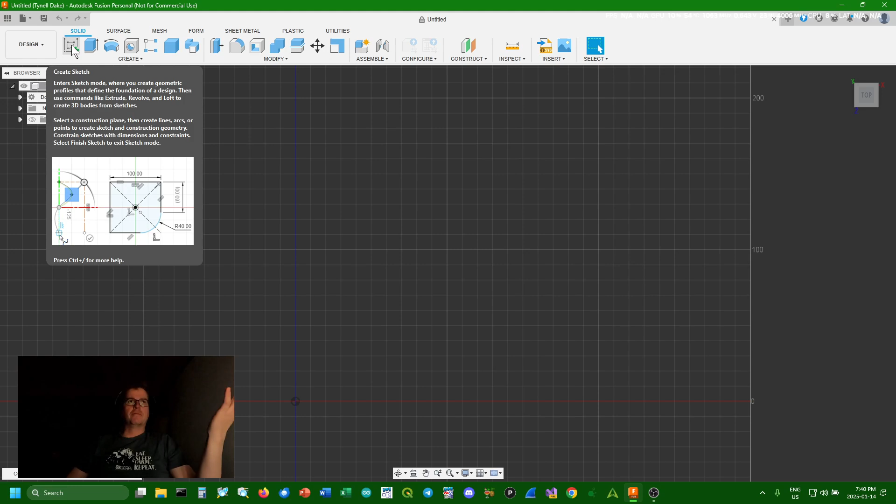Okay, so first you'll have to go to create sketch, and you pick create sketch. Then you're going to pick the plane you'll be drawing in, because since it's on a cube, you could have started not on top—you could have started on the front, or the bottom, or the sides. So you want to pick which plane you want to draw on, and I always start from the top. So click on the top.

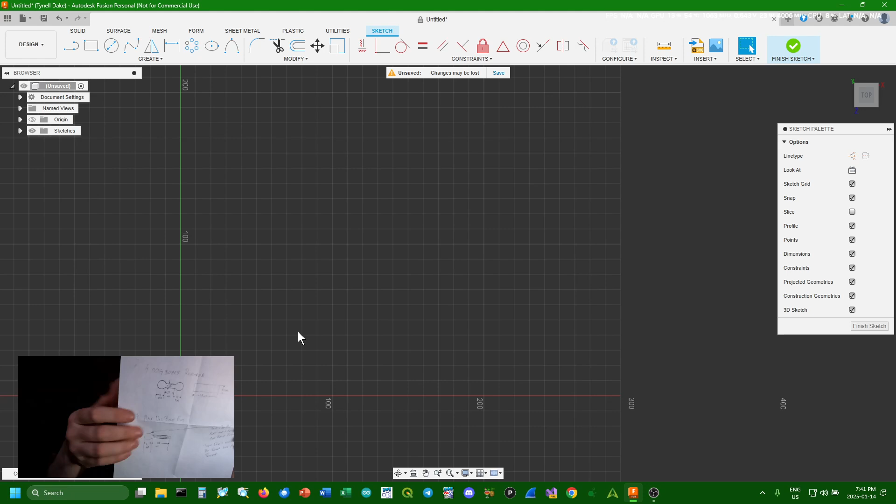Now you'll see this top changed, and now we have the drawing palette up. My father-in-law is the guy with the trains for my son, so he sent me these absolutely lovely drawings with very detailed measurements in millimeters. So we're definitely on the exact same wavelength on that.

Trying not to cover my face the whole time I'm doing this. Our first thing we have to do is we need an 11 millimeter circle.

So I go up here, I pick circle, and it's very dark—it's Canada, it's wintertime, I'm in my basement. Okay, so we pick a circle.

Circles on this thing, you always draw them as a radius, but they always measure as a diameter. So just keep that in mind.

Okay, so my Bluetooth disconnected and reconnected, so that might happen a few times today. Hopefully not—let's check... no, I've got 70% battery. Okay.

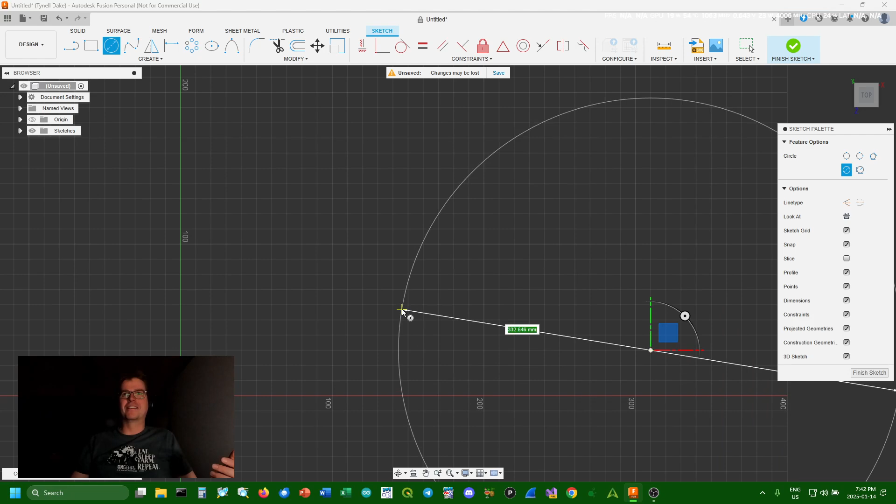So we need to draw a circle. The very first circle I need to draw is 11 millimeters, so we give it a diameter of 11 millimeters, and one of these blocks is 10 by 10 millimeters.

So we'll zoom in so it's easier to see. Then he has the total from this edge: it's two 11s and a 13, so we've got a total of 35. So we're going to go from here.

I picked line. This is where it gets kind of goofy. I'm going to go from the center over to the edge, because I'm trying to make this little dot—it's late at night, so I think it's a vertex.

I can't remember now, it's been a while—last time I stepped foot into college was like, gotta be 2005. Anyway, you get your little dot drawing from the center, because the center already has the dot on the circle, and then it'll auto grab the edge of the circle.

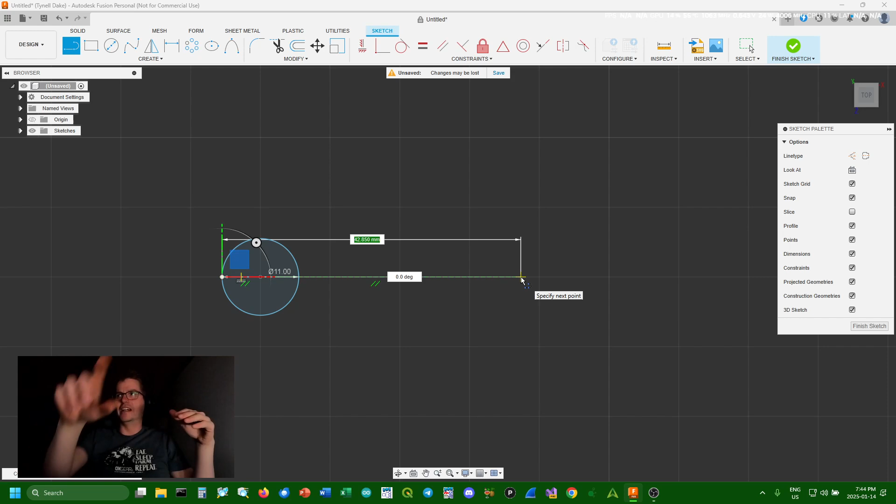Now I have the dot there, even though I have this little line here. Now I can measure back, so I pull the line over, and you can see the box turns green. Right now I can just type it in, so I wanted 35. All right, so now I know when I draw my next circle, it'll be 35 away.

So I'll click on circle again, and if you look here, there's what's called a 2-point circle. Most of your circles will be the center diameter circle, meaning you're picking the center and drawing it out, like that. To get out of this, you hit escape.

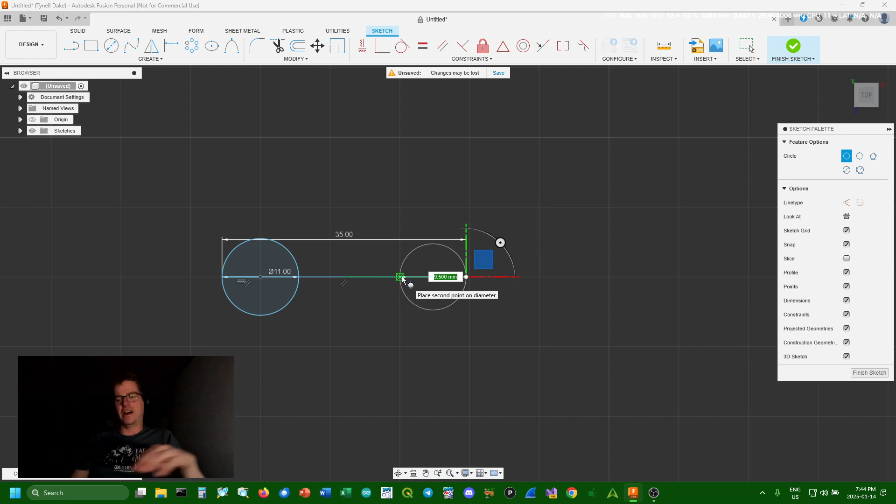But we want what's called a 2-point circle. So I'm going to start my circle on this point, and drag it back. I want it also to be 11. Then I hit enter, and bam, now I have the right dimension, outside to outside.

He gave a dimension of 13 in the center, but for drawing this it really doesn't matter too much. He says the thickness is 5 millimeters, so there's a few ways around this.

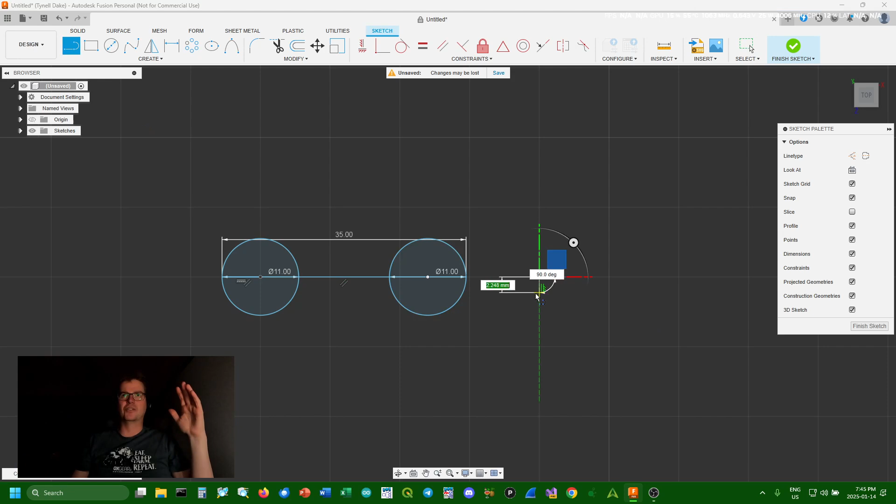One way is we're just going to go up and type in 2.5. Oh yeah, sometimes it doesn't take it. So we're going to go 2.5 and then hit enter. Okay, so now we have 2.5 there.

And then we're going to go up here. Sometimes I find if you go to the next one, so it latched onto 10 there, but now I'm going to type in the 2.5, and there it took it. So now we have a 5 millimeter thickness.

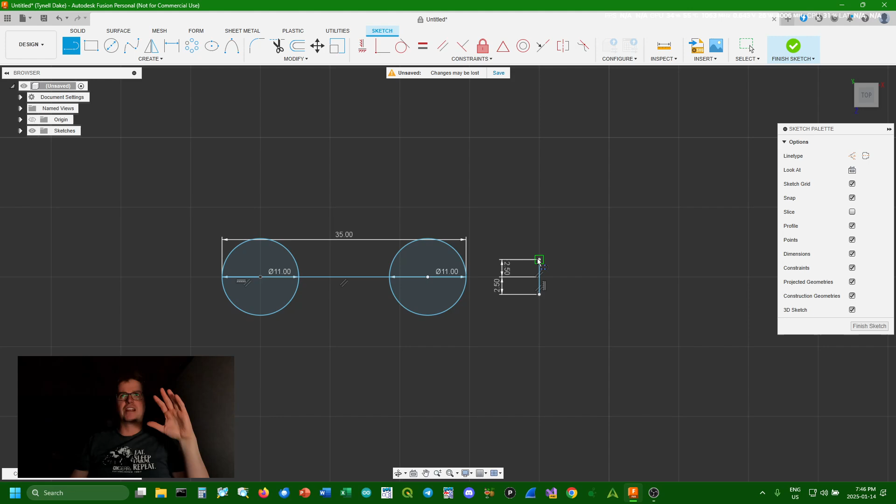You can see it starts drawing that green line, like that. That's kind of what we want. So we'll lock onto this vertex, then go out and latch onto the circle, then draw this one, and hook onto the circle.

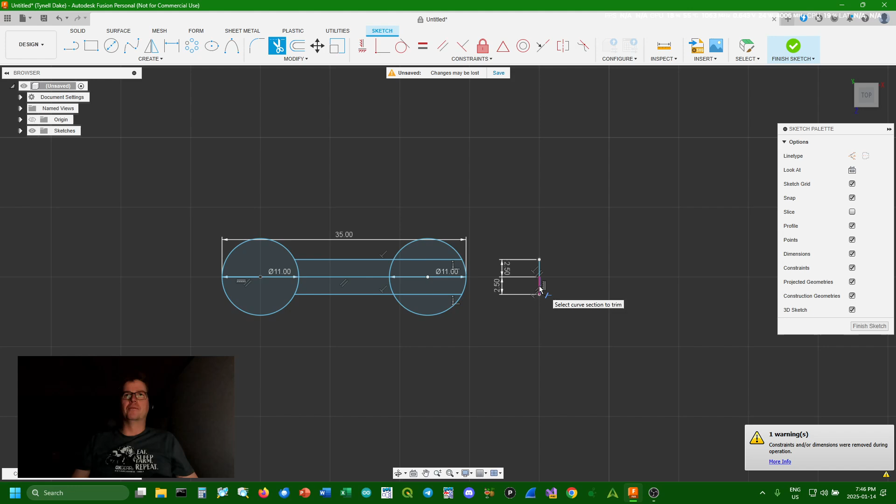So now, yeah, my hands are always up, but you want to take this trim tool, you'll use this a lot. So we take this, and now we can clip this out. We can clip that out, and that, and we can clip the inside of the circle out like that.

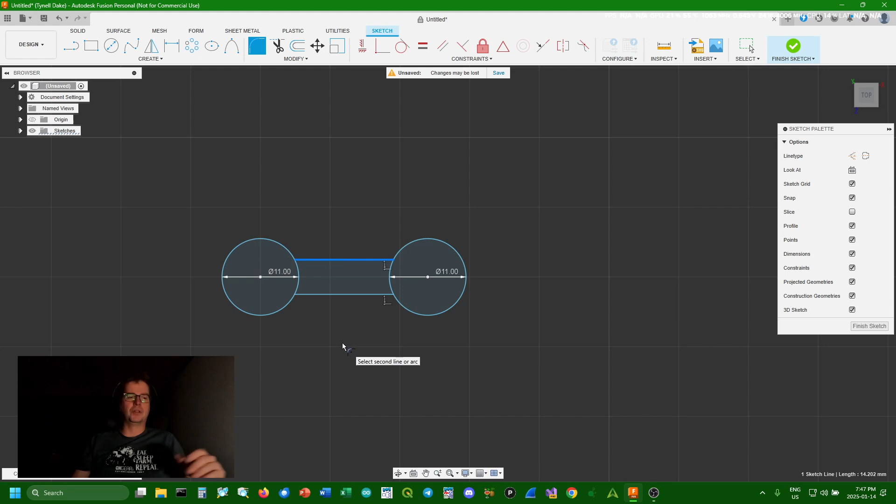So we'll go to the fillet button, we'll click on it, and then we click on it, and we click on the circle, and it does nothing because it only really works between two lines.

So unfortunately that ain't gonna work for us. I'll zoom in again, I'll try it one more time. If I click there and I click there, let's see, there's no actual angle there, so can't fillet it. But if we take our trim tool again and cut the inside of the circle out, now I think it should take off and do it. Oh yeah, there we go. It's just going to put in 1 millimeter, and that's all we want.

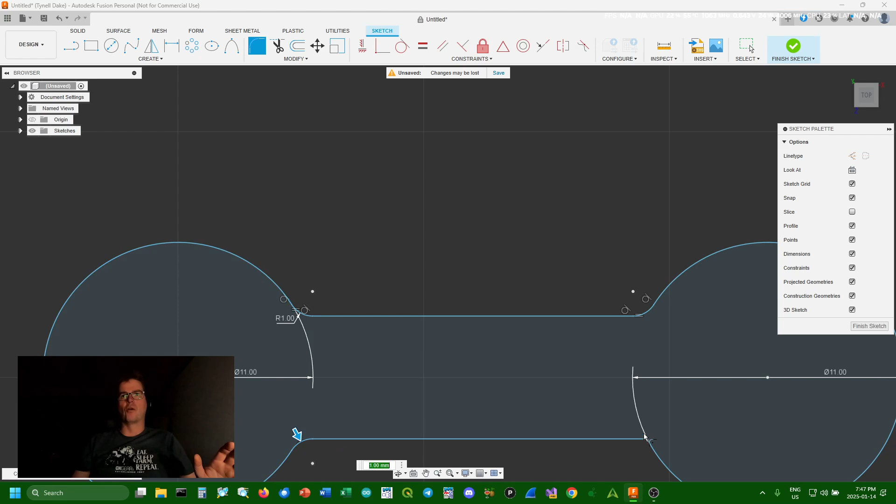Part of the reason we're doing this is you don't really want these sharp 90-degree corners on things, because that's a place where you're probably going to have cracking if you're doing 3D printing. So we're just going to get rid of those.

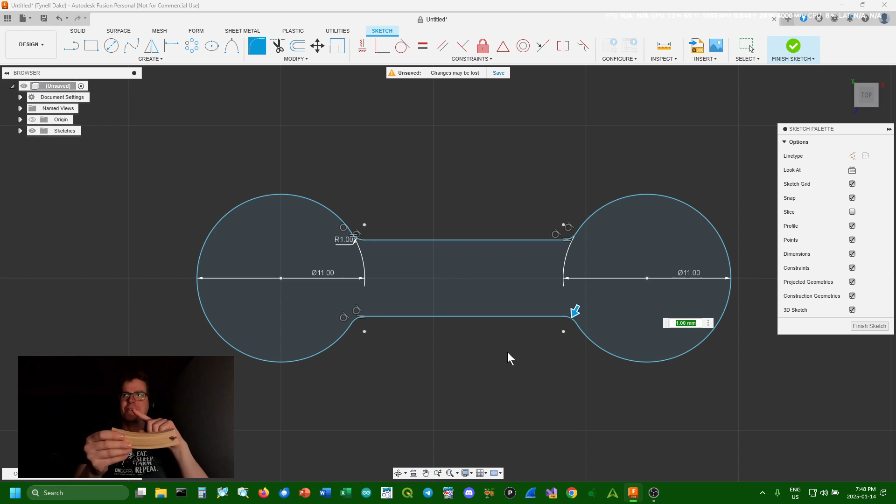There we go. So this would go on this railroad track, and you got to picture a kid playing with it. On the bottom it's very flat, and I think this dog bone, if you just put it in and it's the least bit loose, it's just gonna want to ride out. So even though he doesn't have it in the photo, I know it's gonna work better with a little bit of an apron around it at the bottom, so that when you put it underneath on the floor, it just can't ride up through.

So we're just going to add that. If you go to the offset and select that, it'll select this whole outer line if it's not broken. And then it's trying to offset it to the inside now.

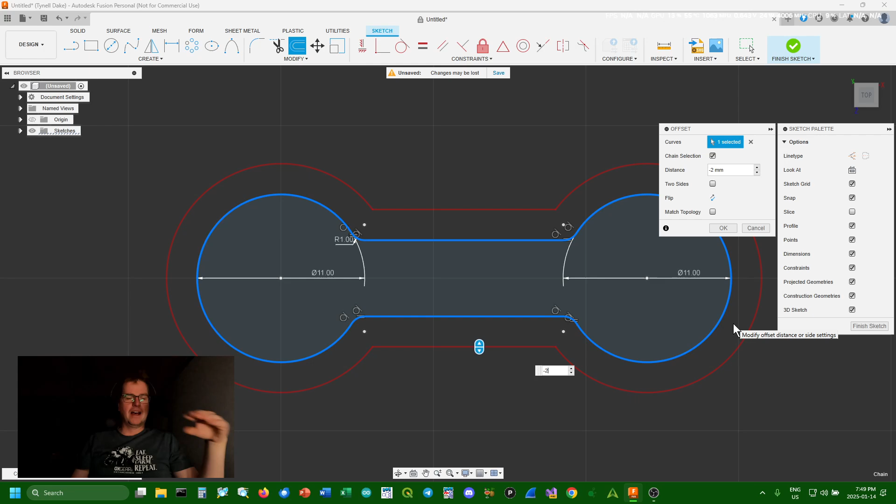But we're just going to go to the outside, maybe 2 millimeters. Well, it's -2 because we're going to the outside. And -2 isn't always to the outside, but this time it is. So now we have a little bit of a lip that'll keep it seated at the bottom. We'll click OK, so now we have the shape.

So now how do we go 3D? This is probably the hardest thing, maybe not, if you haven't figured it out. So we're gonna go finish sketch, and now we have this dog bone shape.

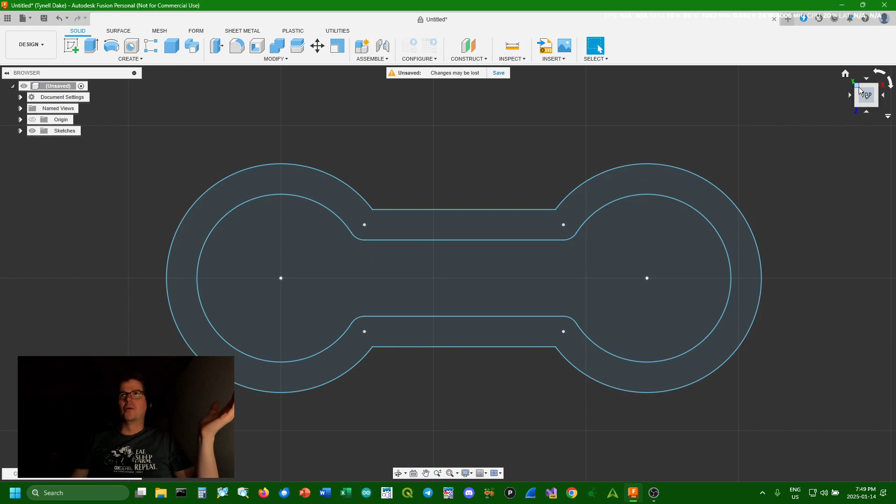We're gonna grab onto this cube and tilt it so it's kind of on its side. Then we're going to pick this extrude, click on it, click on this, grab onto the arrow. We're going to check what thickness, it would be 11 millimeters. Oh, I just noticed that he had the full length of 35 millimeters.

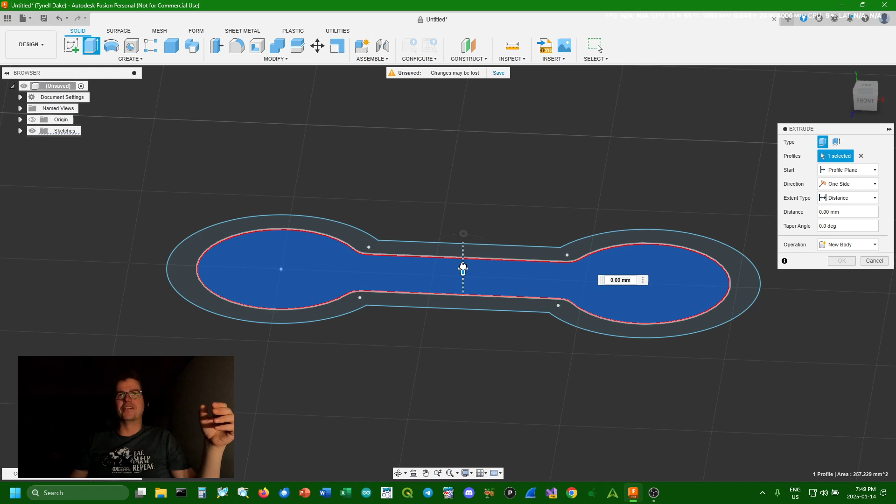It's nice having a father-in-law who knows how to draft a little bit.

At any rate, I could pull it up slowly, or I could just type in 11. Beautiful. Then we click OK, and it says right here, a new body.

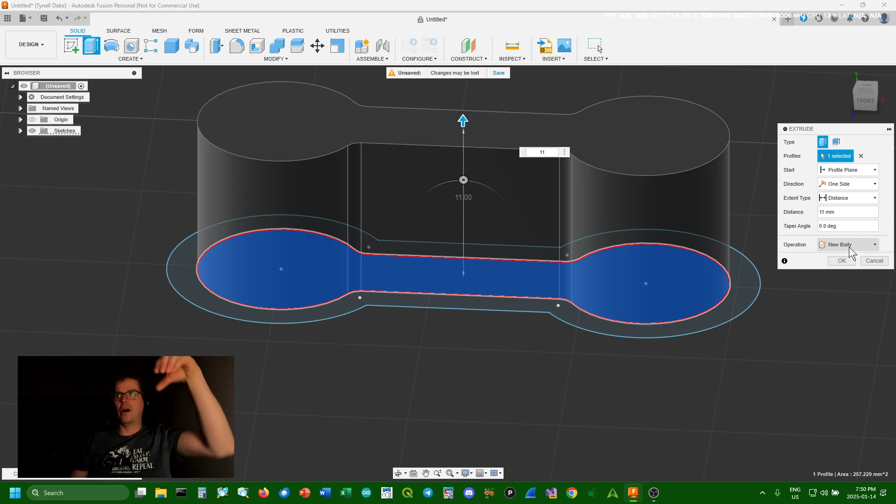Once you do this, it's like having a fake piece of plastic on the screen, but it's an actual part. So now if we take a look, we have a 3D dog bone.

I want to make that little piece on the bottom that's going to keep it like in the railroad track, but not really make the track ride up. It doesn't have to be very thick, but I'm going to have to hold the control key.

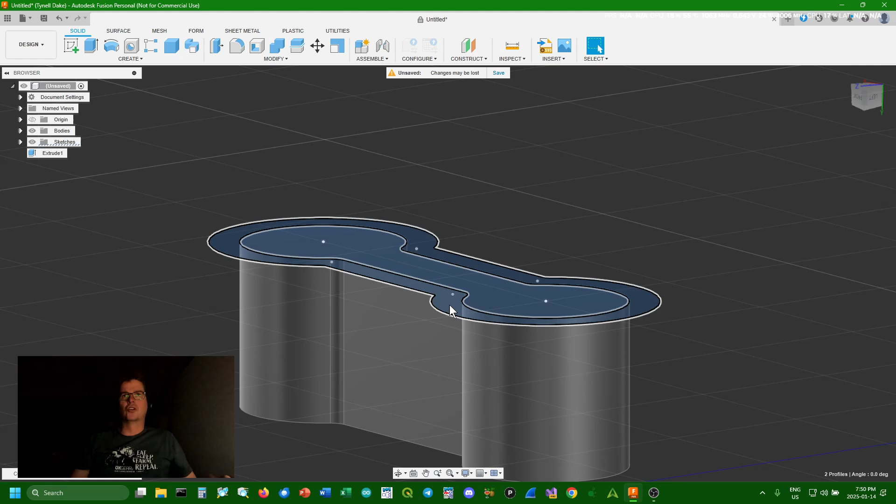If I go back to extrude, we're going to lift it up 1 millimeter. It doesn't sound like a whole lot, but it might do it. So I think we're just going to try that.

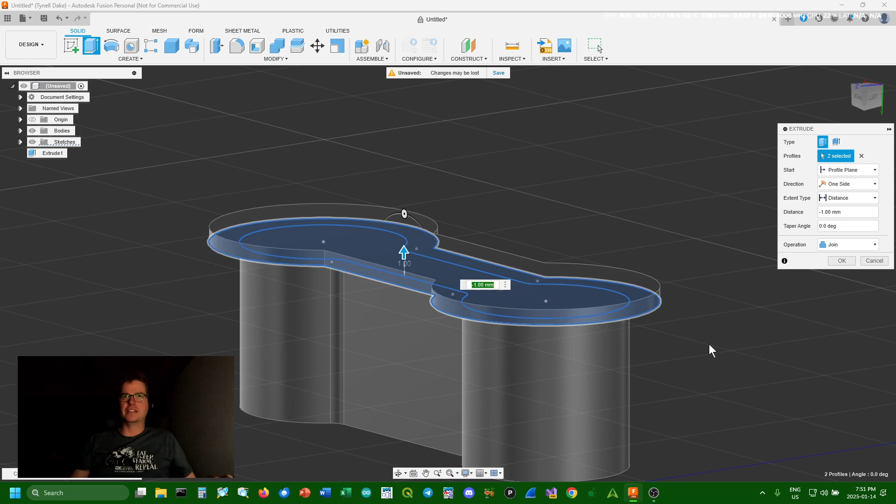Now there's a very important thing you've got to check. It says over here on operation, it says join. That means it's going to join this piece of fake plastic to this other piece to make one. And you click OK.

Then we're going to go over to the sketches tab, and we'll make the sketch disappear. Now you can clearly see that we have the dog bone shape with the keeper on the bottom. And that is pretty slick.

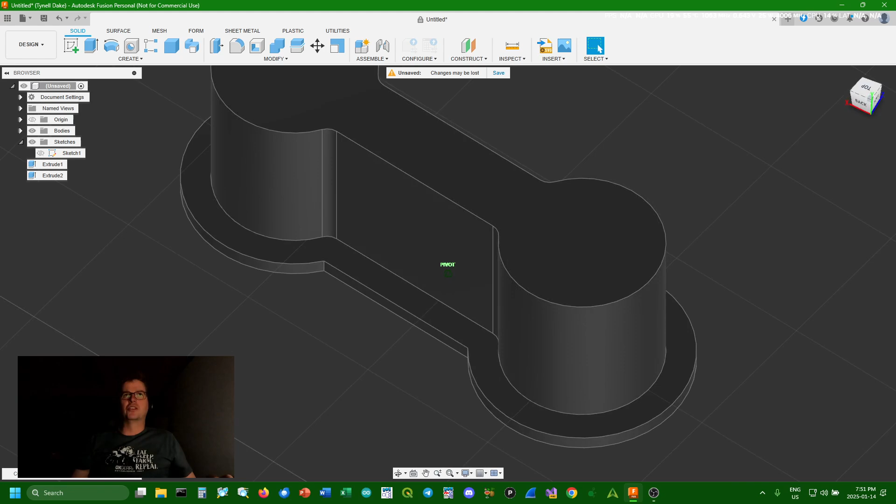To make this easier to go into the piece of wood, instead of having this 90-degree edge on the top, we'll go over here to the fillet command. We'll click on it, and click on this edge.

You can just grab onto the blue arrow and pull. Overall it's pretty fast, but let's set it to 0.5 millimeters, making a 0.5 millimeter round edge on it.

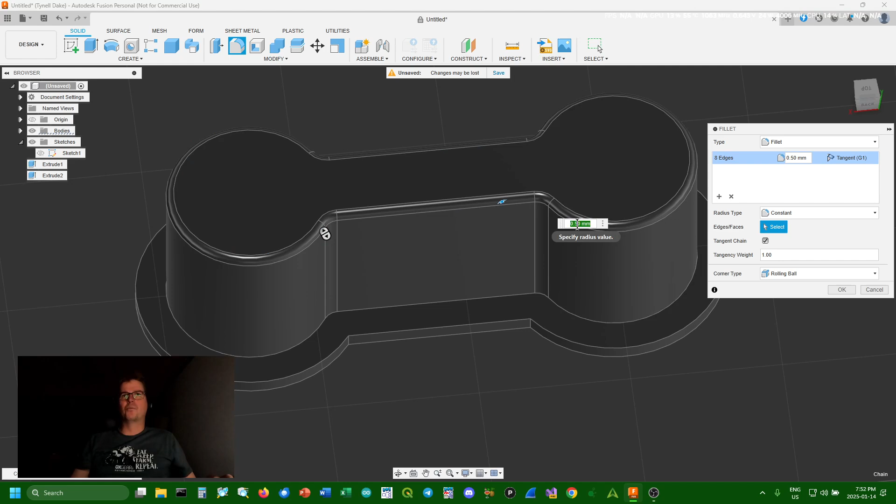Just to make it easier to use. And yeah, I'd say I am done. That is the piece that is required. So you can see how rapidly you can come up with a plastic part you need.

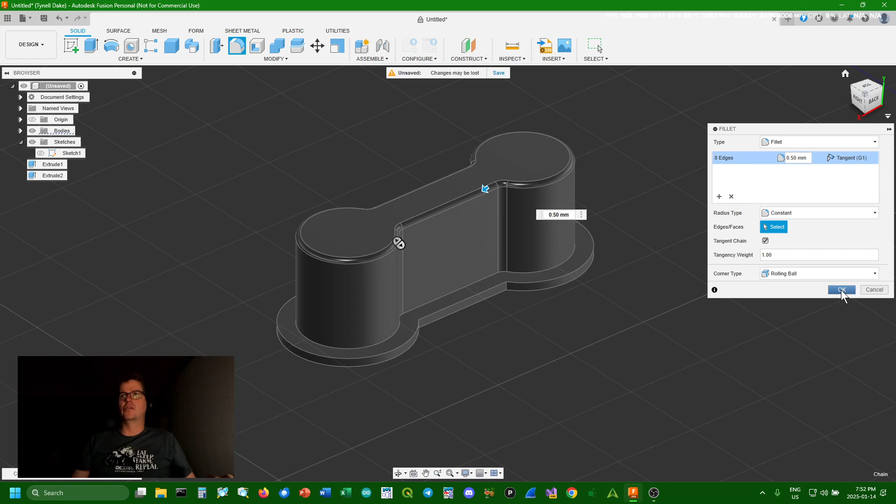And then the next thing is to 3D print it. So we're going to click OK to save and fillet.

You might actually want to save every once in a while. So we're going to type in wooden train connector. Okay, save that. Pops up nice.

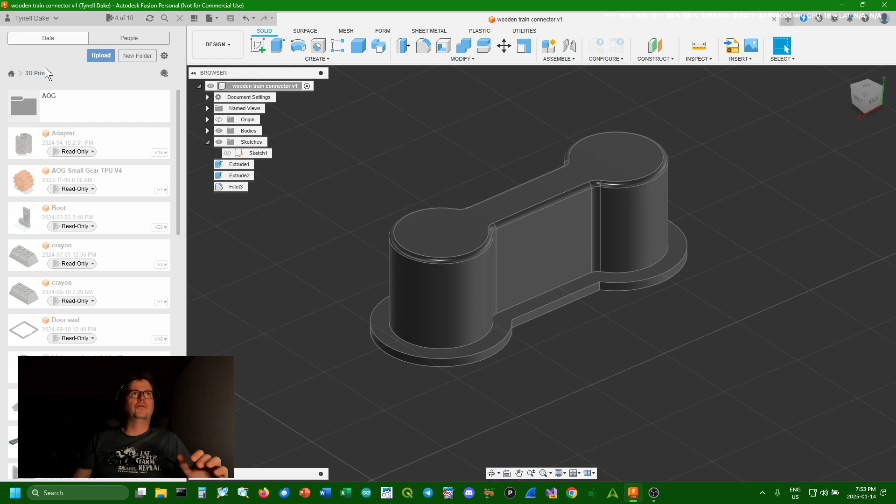All of your files are in the data panel on the side, so that's where you find all the stuff you save. And then you can hide it just by clicking X.

But all you have to do to get your STL is you go to File, 3D Print. So for preparation type, we select export.

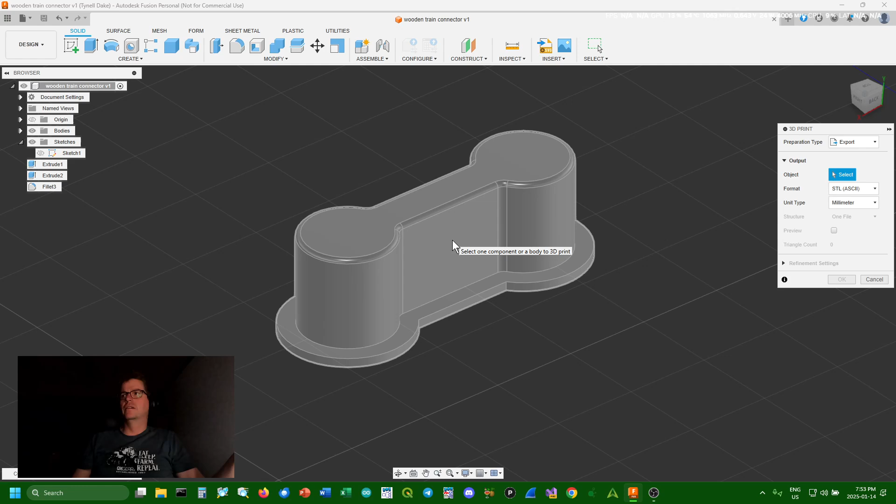My Bluetooth just connected and disconnected again because, of course, when you're trying to do this and the only mic you have is your earphones, it connects and disconnects like crazy.

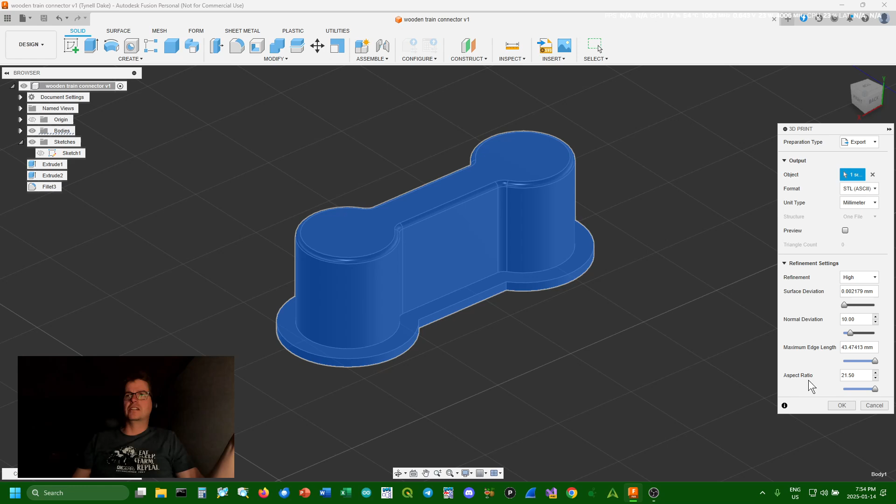So we've selected the object. There we go, one selected. We wanted an STL ASCII, unit type millimeter, and then refinement settings. I've always got it set to the max. So I click OK.

And then this one would be wooden track connector, saved as an STL file, and it's going to go onto my desktop. And then when I hit save, there we go.

It's out of Fusion now, so we're just going to fire up Creality.

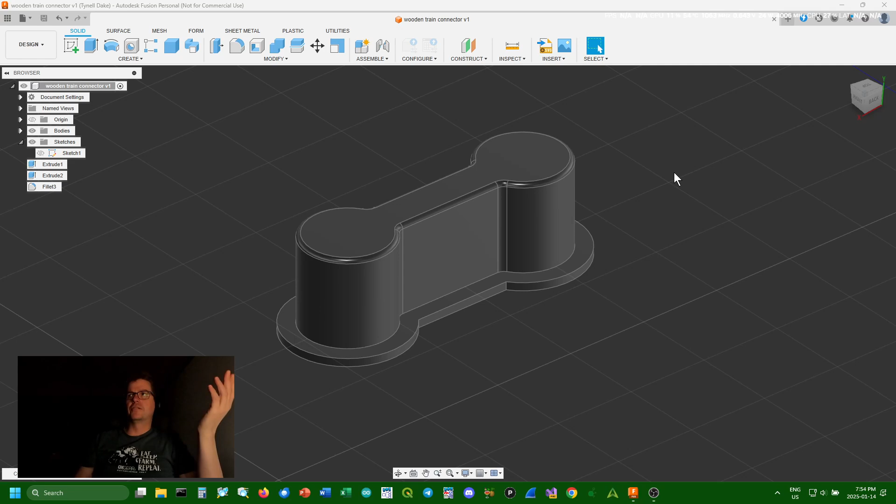Bluetooth connected, Bluetooth connected, okay. Wow, okay, I'll do this later. Skip this version. Actually, I'll just hit X.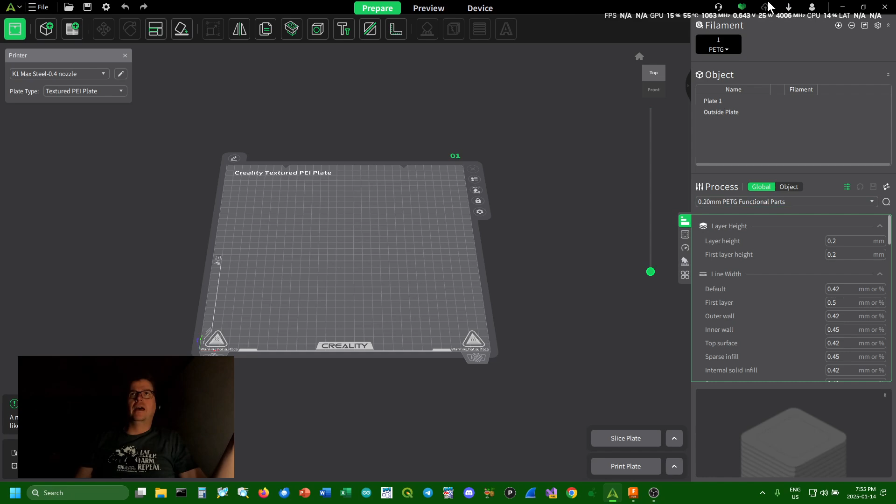So you've got your Creality print, and I'll just make this small, hide this. Where did that go? Wooden - oh, I spelled that horribly.

I just drag it and drop it in, and then if we zoom in here, this button right here is great. You click on what's the bottom, and there you go. And I think he wants four of these.

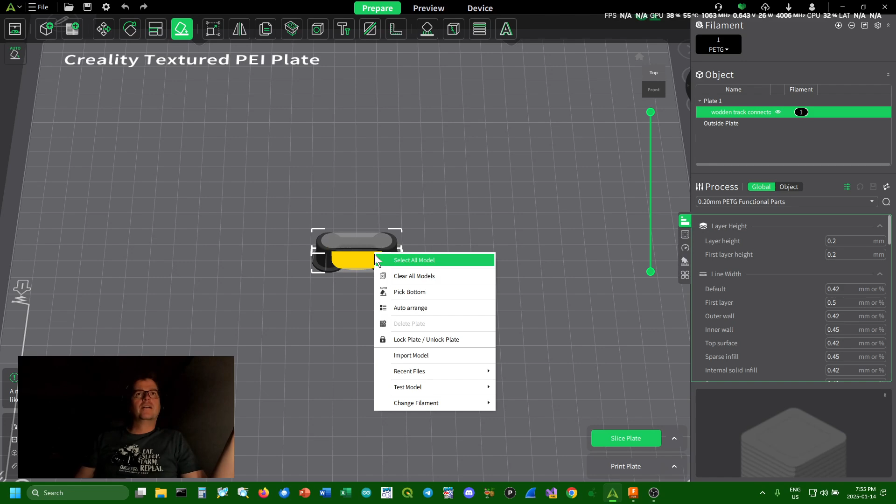So then I just copy paste. Yeah, I'm not as quick at this one as I am on the other one, but let's just try Control C, Control V. Oh, there we go, so the old Control C, V works.

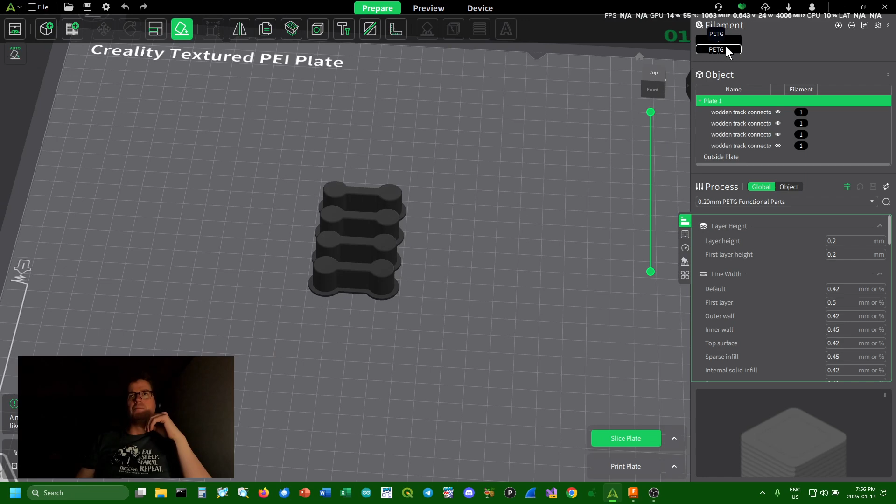So we've got four of them now, it's got them all laid out. I check over here, I'm doing PETG, and yeah, let's try this out.

Let's slice the plate. There you go, that's it. She's sliced, G-code is created. All I've got to do is click print plate and it'll go on my printer and print these off.

That's how easy it is to make things on Fusion and then put them into Creality and print them off. That is the magic of 3D printing and AutoCAD all together.

I wish I could figure out a way to actually make money at this, but for now, it's fixing all sorts of little things around the house. Yeah, kind of a great system, I like it.